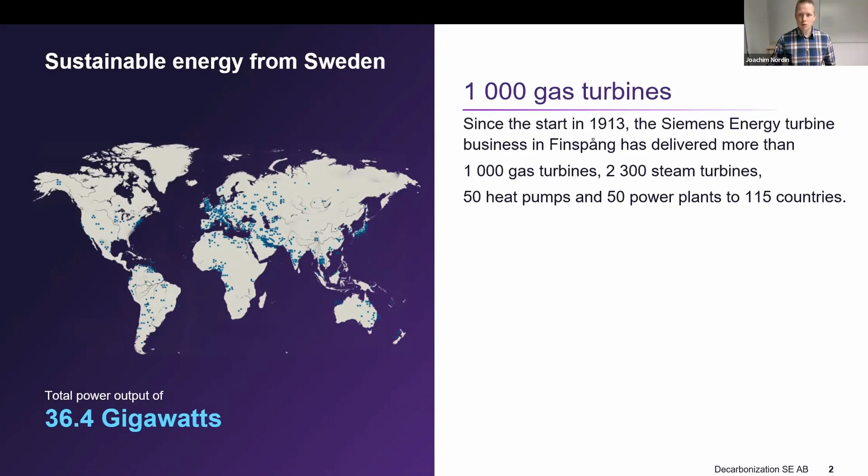And our current offerings are focused around medium-sized gas turbines with an electrical output of 24 to 62 megawatts in simple cycle operation. And we also have industrial-sized heat pumps in a range between 15 to 40 megawatts of thermal output.

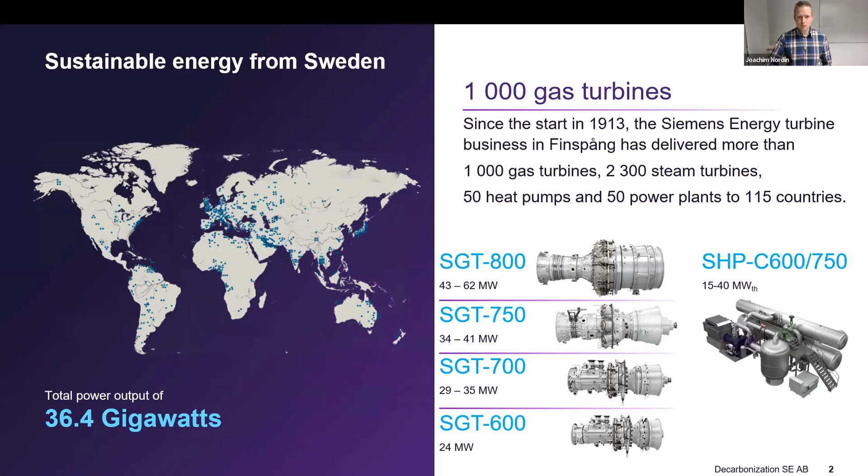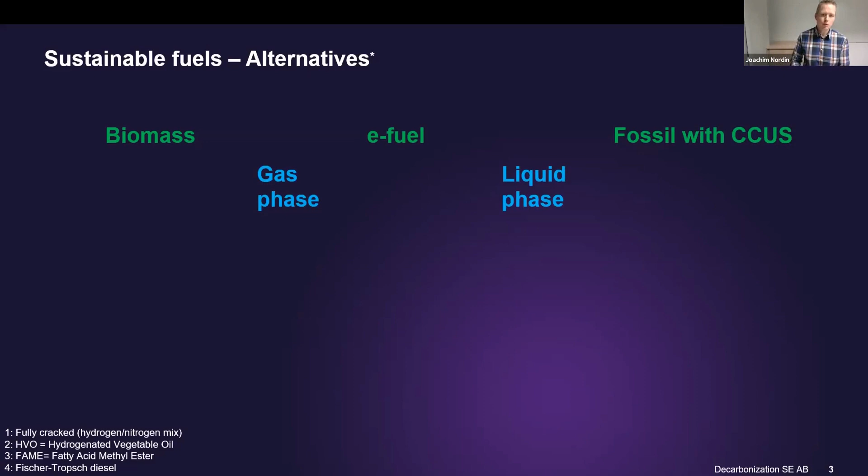And when it comes to decarbonized fuels for gas turbines, we have many different options with regards to feedstock, such as biomass, e-fuels from renewable sources, or even fossils with carbon capture, utilization, and storage. The fuels can come in liquid phase or gaseous phase, and their chemical compositions vary a lot with a huge variation in characteristics. This gives a very diverse landscape in the available options regarding decarbonized fuels.

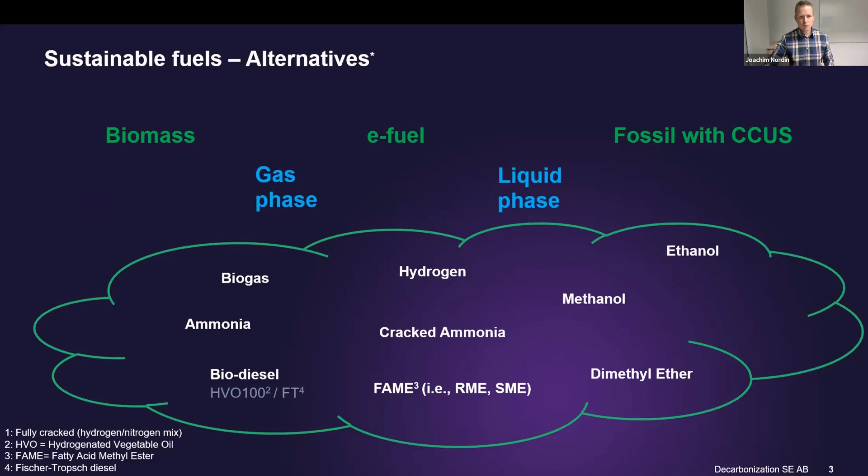Siemens Energy works with multiple different fuels at the technology development level. And the more mature options are already released or are in the product development phase. The more prominent variants are hydrogen, that we currently offer at 75% volume co-firing with natural gas. And we are targeting to have 100% hydrogen capabilities at the latest 2025 in our products.

Cracked ammonia, that means it's a pure stream of hydrogen and nitrogen when you have cracked ammonia into its components. That one we currently offer at 50 volume% co-firing with natural gas. If you look at the liquid side, we offer HVO100 biodiesel as an alternative. And there are many options on our roadmap for the future that we're looking into and investigating.

So the path forward is kind of volatile with many disruptive elements. And we believe that through collaboration and partnership, we get a clearer view together with our customers of what the future holds.

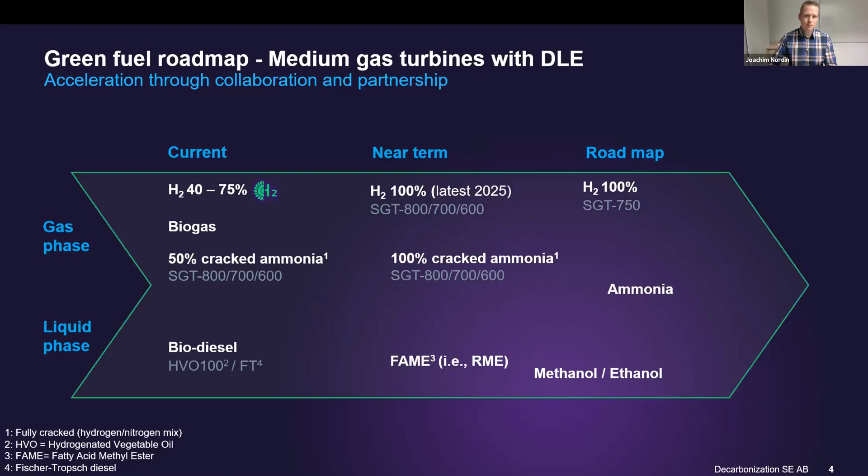If we go into characteristics of the alternative fuels, they differ significantly compared to the traditional fuels used in gas turbines, such as natural gas or traditional diesel. The picture on the bottom left is from our atmospheric combustion test rig, where we have optical access to the combustion chamber and the burners.

And we can clearly see here when we increase the amount of hydrogen in the burner from 0, that means pure natural gas, up to 100% hydrogen, that the shape of the flame becomes much thinner and it's situated much closer to the burner tip compared to the natural gas case. These changes in behavior need to be adapted for in the design with special considerations.

And our current capability of 75 volume% hydrogen in our combustion system corresponds to a CO2 reduction of around 50%. But as can be seen on the chart to the right, there is a non-linear behavior when you increase the amount of hydrogen. So each step on the development path going forward is steeper and more difficult to take compared to the one previously done.

So the special characteristics of hydrogen become more and more dominant as we increase it. And we'll end up in a state that you can see in the picture to the left with a very changed behavior in how the combustion behaves in the gas turbine.

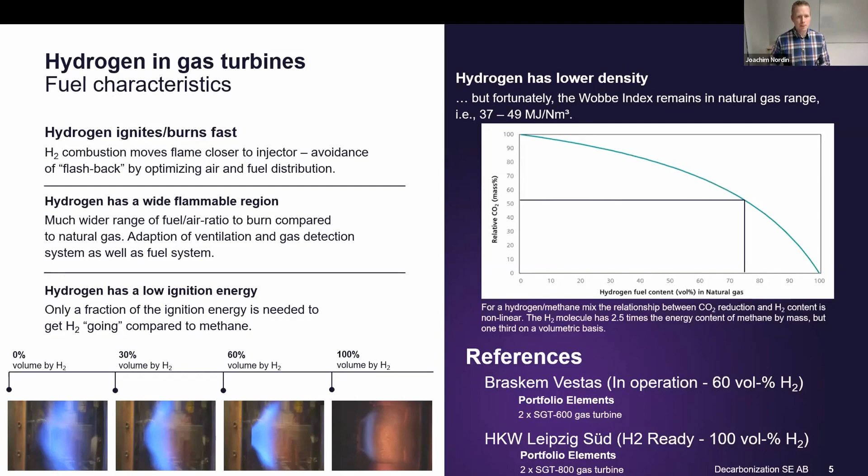An alternative to storing hydrogen in its pure form is to use ammonia as a hydrogen carrier. This one can be especially attractive if you want to have long-term energy storage, or maybe long-distance shipping of large quantities of energy. We believe that fully cracked ammonia is the best option suitable for us, and it offers very good synergies with the development we are doing on hydrogen as a fuel.

We have already successfully tested 100% fully cracked ammonia in high pressure single burner tests at the Clean Energy Center in Berlin. And that is done under real gas turbine conditions with full pressure, full temperature conditions and everything.

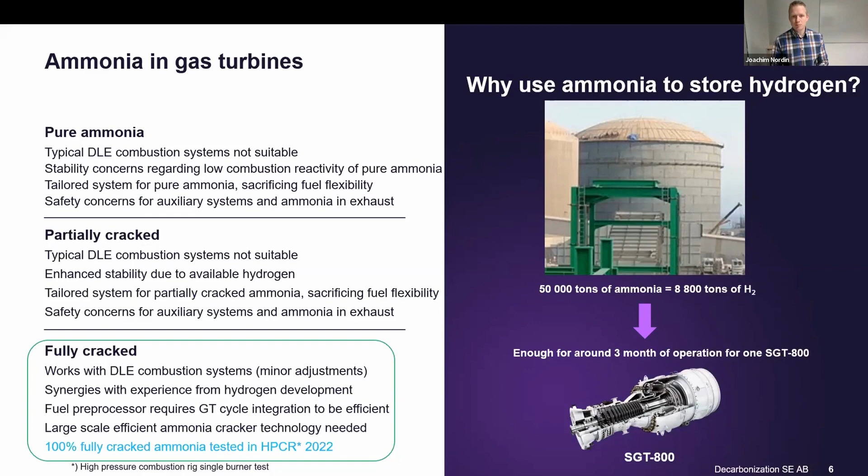And regarding biodiesel, there are many different alternatives, and they each have specific characteristics. HVO100 has been tested during a cooperation between Siemens Energy and Göteborg Energi at their site, Rya Combined Heat and Power Plant, situated in Gothenburg. HVO100 has since been released as an approved gas turbine fuel to be used in our products from Finspång.

And when you compare HVO100 to other types of biodiesels like FAME or RME versions, there's a clear distinction in the characteristics. HVO100 is much closer to an ordinary diesel fuel. However, there are differences. The FAME or RME version behaves differently with regards to how it evaporates, mixes with the air, and how it combusts and burns in the combustion chamber.

So the green fuel examples I've talked about give you a good flavor of many of the challenges when it comes to designing robust and flexible gas turbines, as each fuel that might be a potential candidate for the future has special characteristics and will dictate how you design the systems.

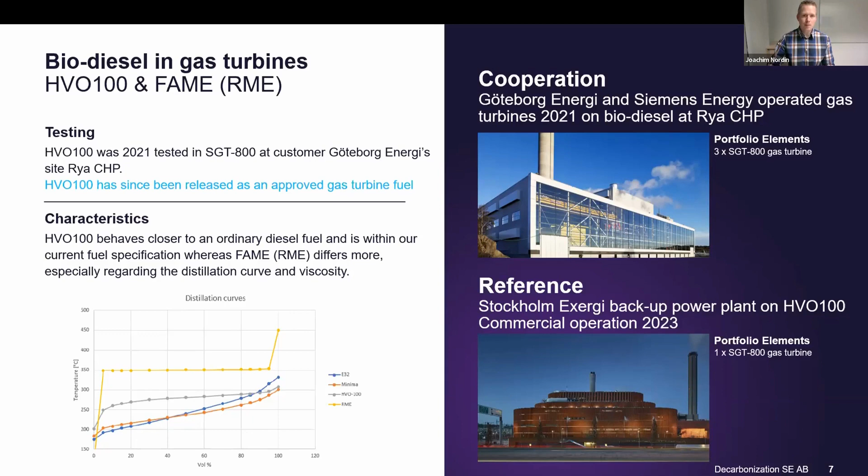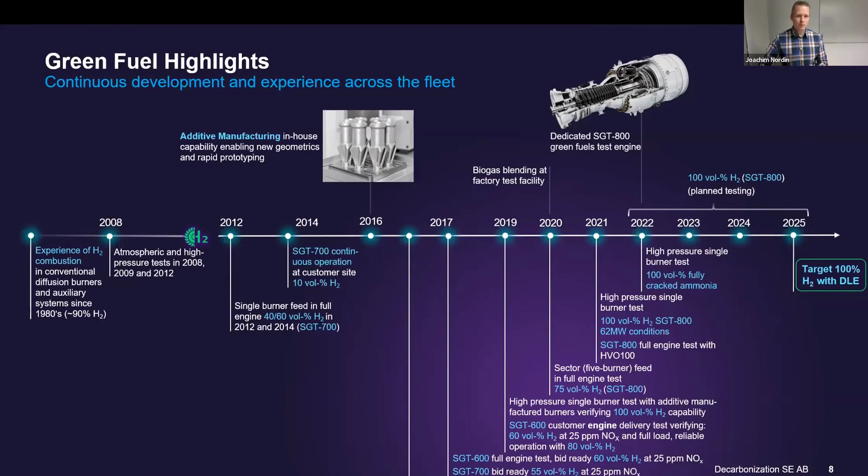So how do we achieve this? The traditional development cycle that we use is that we start off with advanced simulations, but they need to be calibrated based on previous experience and test data, especially since many of the green fuels behave differently compared to the knowledge base that we have on natural gas. You really need to gain more experience to put into and calibrate the simulation models.

And when we're satisfied with the simulation results, we go over to rapid prototyping using our additive manufacturing capabilities. So we reduce the lead time to when we can have the prototypes ready and test them out. And the additive manufacturing also enables better designs. Next step is testing. And here we have multiple different options.

First off, we use single burner rig testing at atmospheric pressure conditions, but we can simulate the real temperature conditions in a gas turbine. And we can evaluate the results based on correlations from historical testing, how the testing corresponds to real gas turbine conditions and full engine operation.

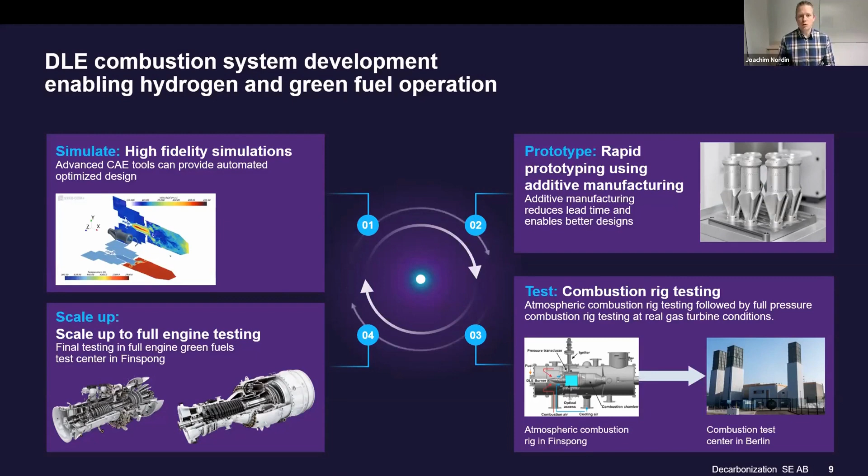When we're satisfied, we take the best performing burners and we go to the Clean Energy Center in Berlin, where we can do single burner tests at real gas turbine operating conditions. From that, it's scale up for full engine testing. For the smaller gas turbines in Finspång, we have two test cells that we can use. They are used either for factory delivery testing before we ship our products to customers, or for R&D green fuels testing, where we can use multiple different green fuels to evaluate and test.

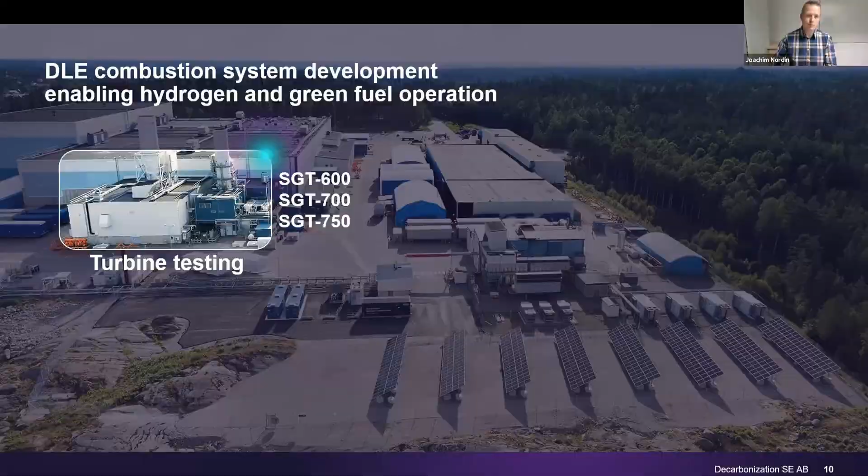For our largest gas turbine from Finspång, the SGT-800, we have built a separate test facility with a complete gas turbine string. So this is the green fuels test engine that I was talking about previously on the timeline. Due to the larger fuel consumption, we had to be clever how we configure this test engine, since availability of hydrogen currently is a bottleneck for us. A couple of years ago, we actually used all the available trucks and trailers with hydrogen in Northern Europe during one of our test campaigns. So the logistical challenges there are quite immense.

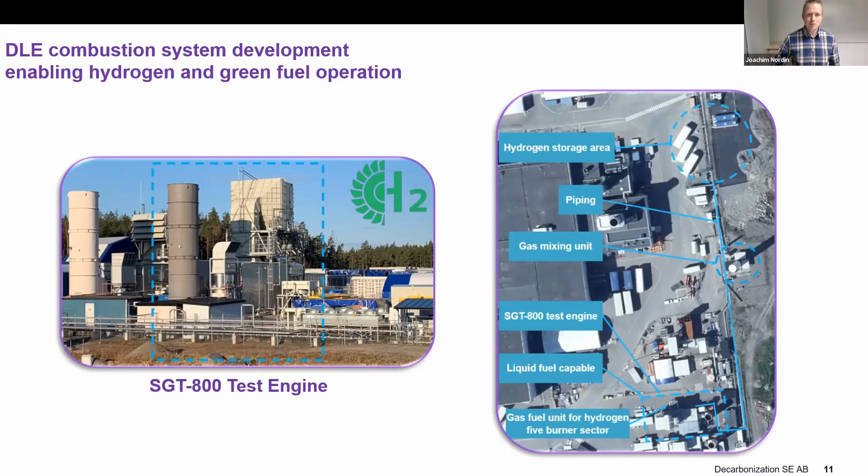The system we developed is a 5-burner sector system. This system lets us run the gas turbine using all of its 30 burners, but we only feed 5 of the burners with hydrogen. Thus, we save a lot of hydrogen fuel, giving us maximized running time to collect more experience and data. The 5-burner sector is also equipped with special measurement equipment so that we can evaluate the results as if the complete engine had been operated on hydrogen.

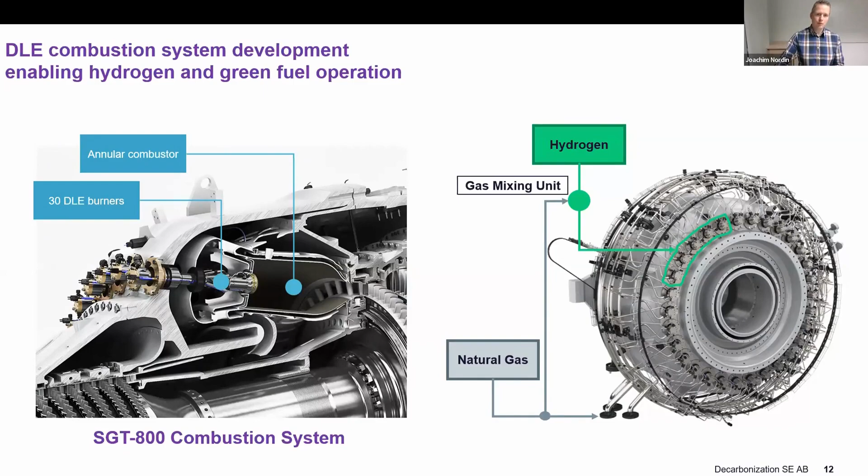To better understand the challenges with renewable energy, we have a microgrid built up at our test facility in Finspång that we call Zero Emission Hydrogen Turbine Center. There we have solar panels, an electrolyzer for hydrogen production, a battery storage system, and hydrogen storage. We use that hydrogen storage for our test campaigns in combination with externally sourced hydrogen. And we're putting in some investments on the hydrogen storage capacity, and we'll increase the storage capacity by a factor of 4 next year.

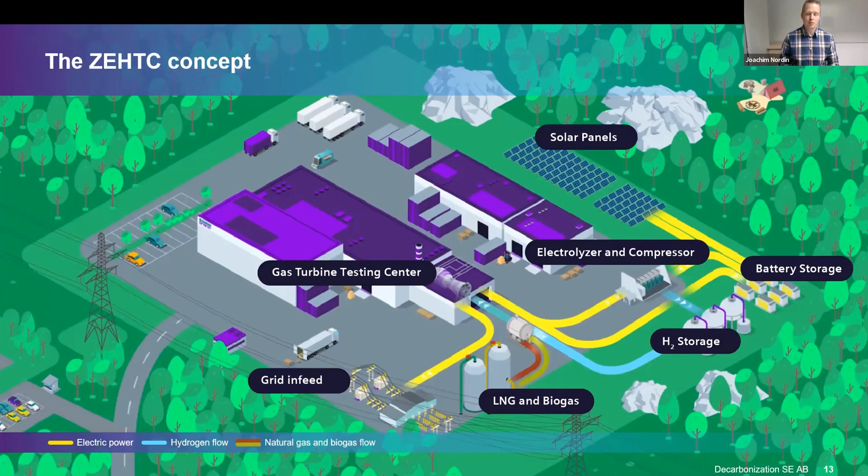Besides the core combustion technology, there are also many other considerations to take into account in the design when it comes to green fuels. For hydrogen, there are many adaptations needed on the auxiliary systems, like the fire detection and gas detection systems, and seemingly simple systems need to be adapted, such as the enclosure ventilation system. This is due to the different behavior of hydrogen. It will disperse differently in the enclosure in the event of a leakage. And the high reactivity will also make you do changes and adaptations, so you still have a safe system that satisfies all the safety regulations on the market.

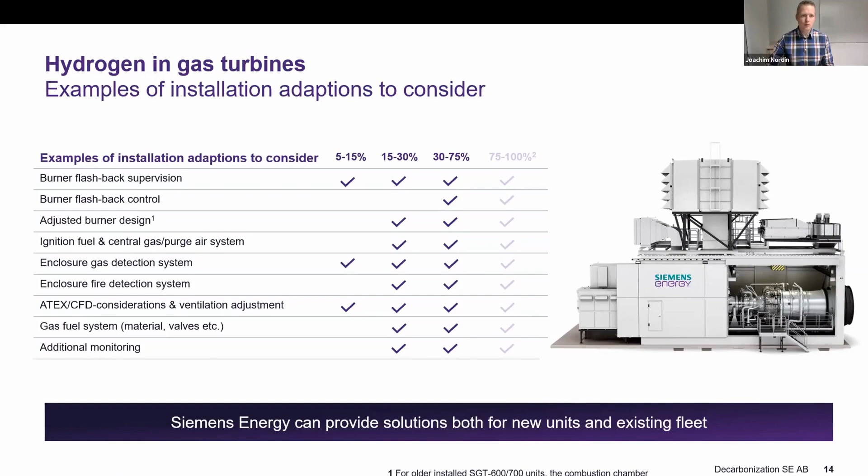Already today, we offer our gas turbines as hydrogen ready. We have developed a concept that has been certified in Germany by TÜV Süd. That means that you can purchase a gas turbine today, knowing that it will be possible to upgrade it in the future when you have hydrogen available at your site, avoiding the risk of stranded assets.

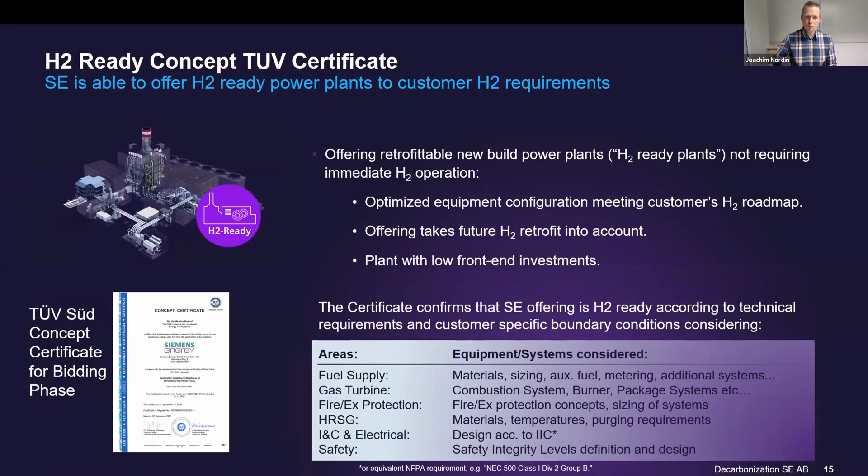Chalmers University in Gothenburg has modeled the competitiveness of hydrogen-fueled gas turbines for a zero-carbon Europe. In one of their models, they simulated a city with about 250,000 citizens. The main conclusions are that gas turbines have an important role to play in renewable energy systems, and that fuel flexibility further strengthens the competitiveness.

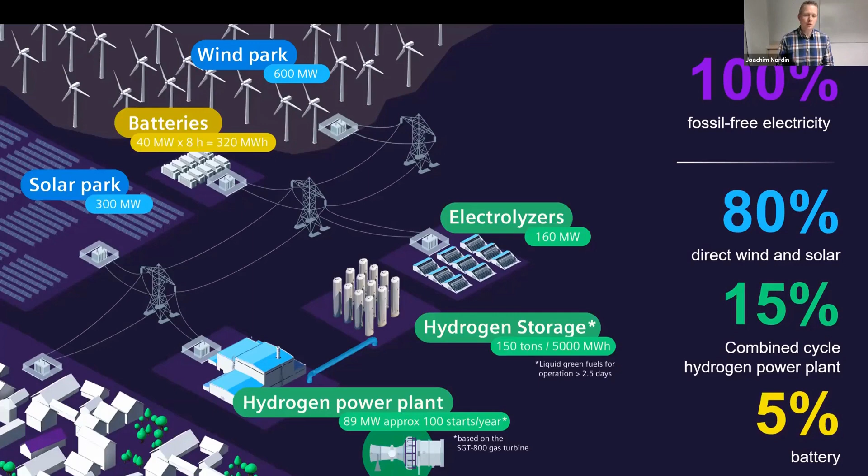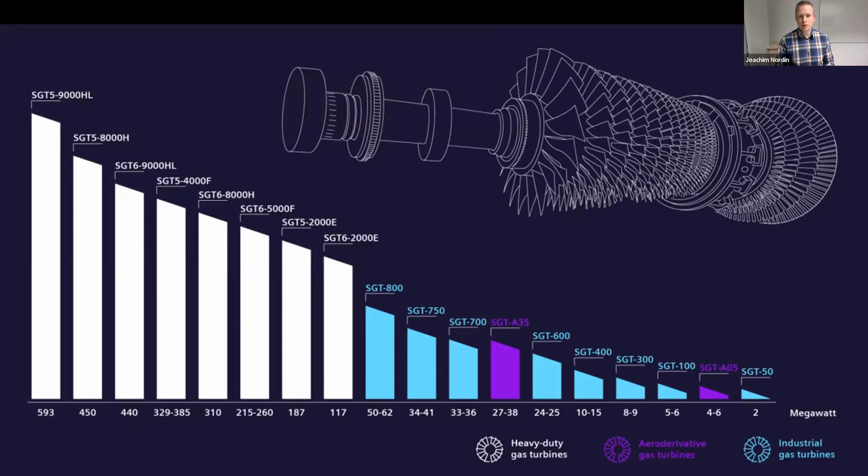And at Siemens Energy, we offer a broad range of different gas turbines to suit specific customer requirements, ranging from as low as 2 megawatts all the way up to 593 megawatts. And we believe in a green future for gas turbines, and that they will play a vital role in a renewable energy system for the future, with a lot of characteristics and features that are well suited for the needs of the future.